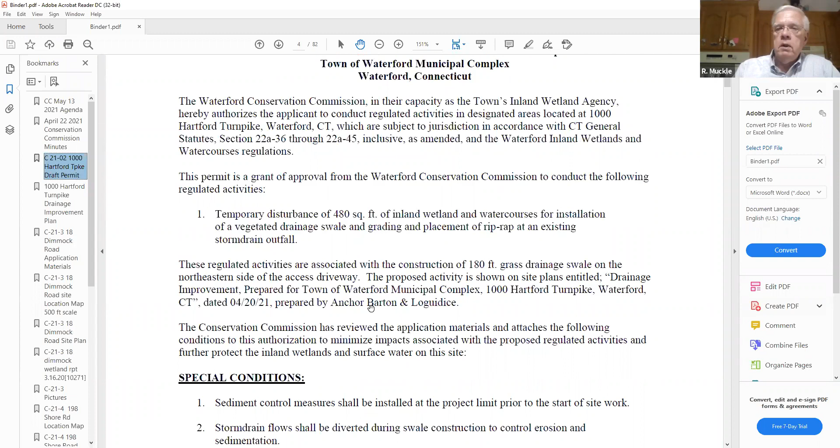Item number 3, application review C21-02, 1000 Hartford Turnpike Drainage Outlet Swale Extension, Department of Public Works applicant, Anchor Engineering agent, review of the draft permit. Questions or comments? Seems pretty straightforward, I think. Thank you, Wade. Any other comments? Questions?

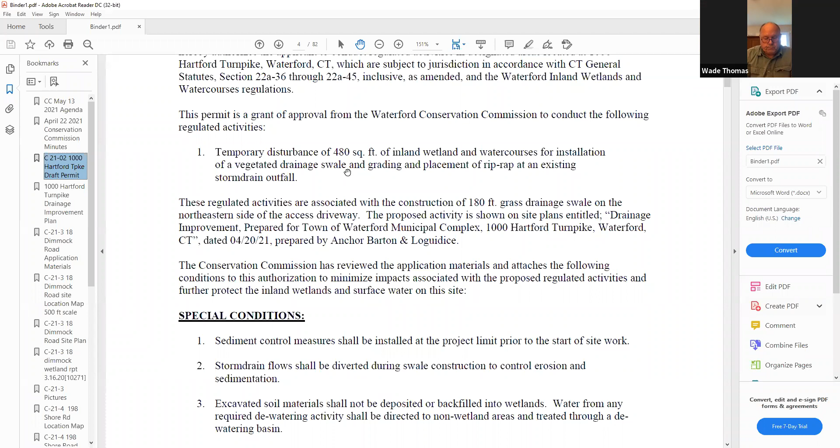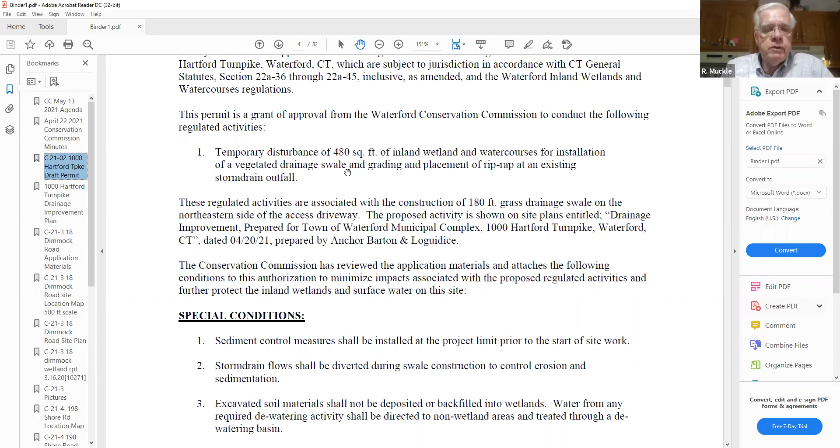Hearing none, I guess we're ready for a motion. Make a motion to approve the draft as written. Wade Thomas. Thank you. I second it, Jessica Patterson. Thank you, Jessica. Any other discussion? All those in favor, please signify by saying aye. Aye. Aye. Aye. Any opposed? Abstentions? Motion carries. Thank you.

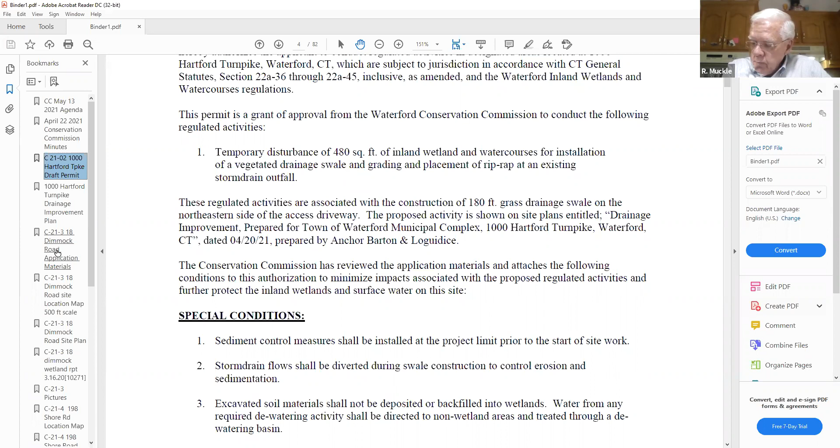New applications. C-21-03, 18 Dimmock Road, residential addition and septic installation. Robert and Grace Kyne, owner and applicant, DLC Engineering Services, LLC, agent. Questions, comments? Okay.

So this is Brian Floric Surveying LLC. I can speak to that, to introduce the project to the commissioner and commission. Well, like I said, I'm representing Grace and Robert Kyne, 18 Dimmock Road, along with Dave Cooley, DLC Engineering Services LLC. Robert and Grace want to install a new septic system in the rear of their property and put an addition onto their home. The addition and the new septic system will be within the 50-foot buffer area. The septic system, which Dave can certainly expound upon better than I can, is antiquated. It needs to be upgraded. It's a little bit of a proactive fix. Ledge Light Health District will not allow them to put the septic system in the front yard. They only want it in the rear.

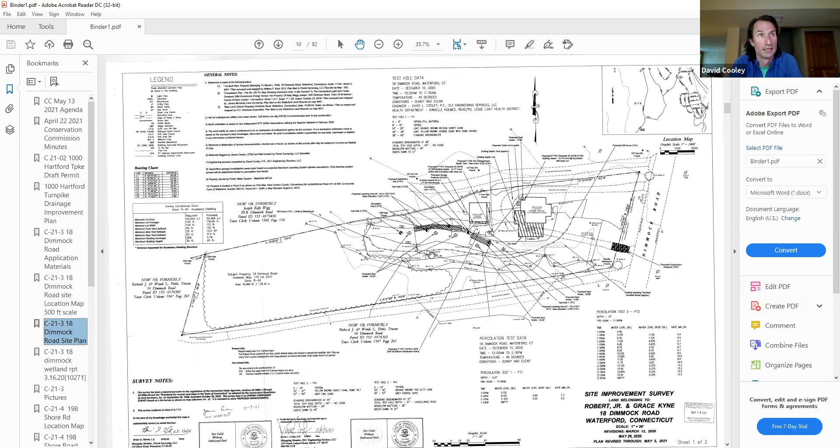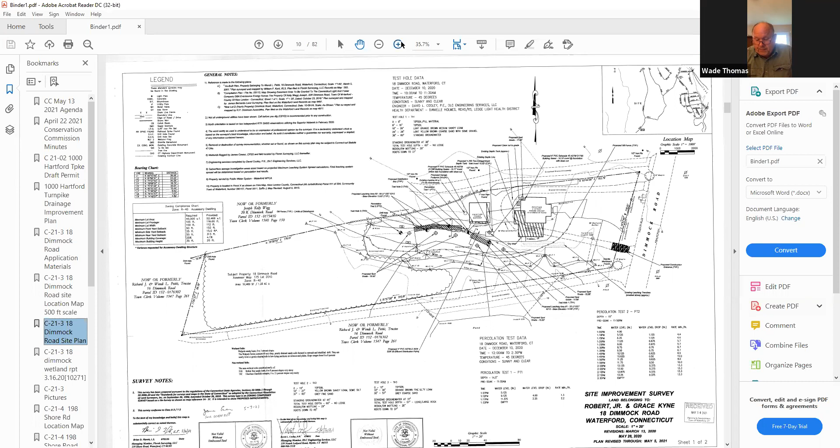Yes, Dave, I was looking at the plan and I'm looking at between wetland flag 6 and 7. There's a line going up to this existing leaching system. Was that just a line for the 50-foot setback, or is there a pipe coming out of there that's going into the wetlands? I can assure you that there's no pipes coming out of the septic system and going to the wetlands.

Okay, it just ends right at the leaching system and connects to the wetlands. I was just kind of curious. Which flags were those that you were citing? 6 and 7. Right there, in that area, then that line connects to the leaching system dashed lines, and I thought maybe it was a pipe. It looked, just kind of curious the way it ends at the leaching system footprint. It kind of goes right through wetland flag number 7. Yeah, 6 and 7, and it goes almost due north, just east of north to the leaching structures. I'm assuming that's dashed lines, so existing leaching structures or system. The dashed, yes.

That line, to me, it looked like a line, some sort of pipe or something. That line is a setback, I believe, from surface water. Is that okay, right, Brian? Yeah, that's fine. I thought it could have been that, but it's just kind of odd the way it ended right at the leaching system, and I just had to ask the question. Thank you. Okay.

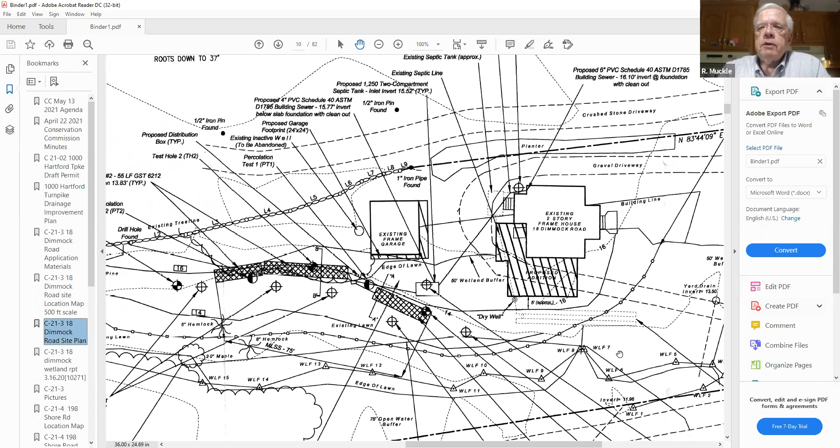Any other questions or comments? So Maureen, this application is just going to be accepted tonight? There's no further action? Yeah, it's set for acceptance. I've had some preliminary discussions with Mr. Floric about it and the owner.

And the fact is that although it's existing land, a lawn in an existing house, it still involves regulated activity, that excavation, construction. It is a much more revised system than the old one. And it is a little farther back, which is nice. And we understand the restrictions of the existing lot. I think it's pretty straightforward if anyone wants to ride by and have a look at it. But the application is complete.

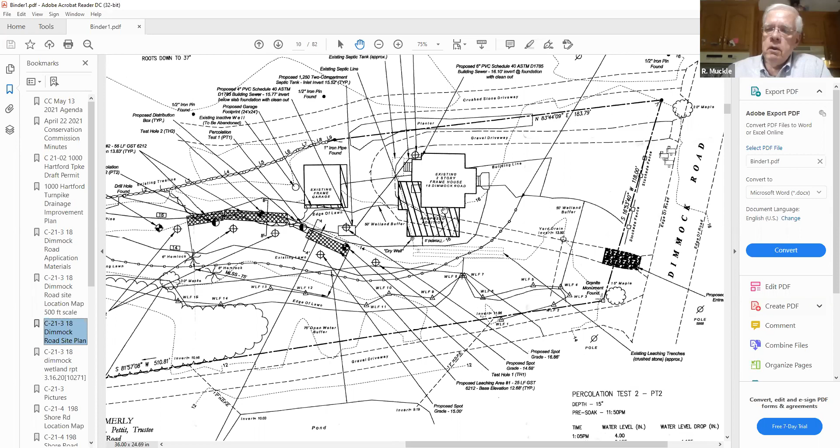We don't need a motion to accept that, right, Maureen? No, it's been accepted and the fee has been paid. Okay. Are there any other questions or comments before we leave C21-03? Yeah, if I could just ask one more question, Wade Thomas.

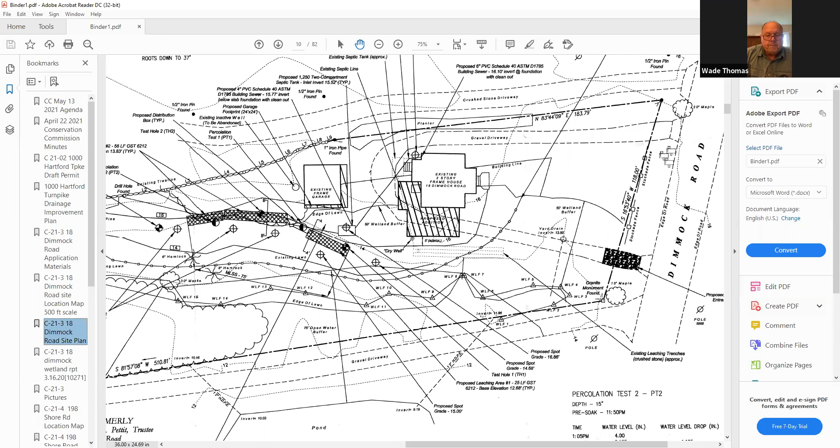The geomatrix, that's proposed to be used. I know it's code compliant and everything, but there's not a lot of storage in the units. I don't know if you're going to have large flows on occasion or that sort of thing. That's the only downside of the units. They're very dense, they're just filled with fine aggregate and the stone. And I was just wondering, was it chosen because it has a large ELA per lineal foot?

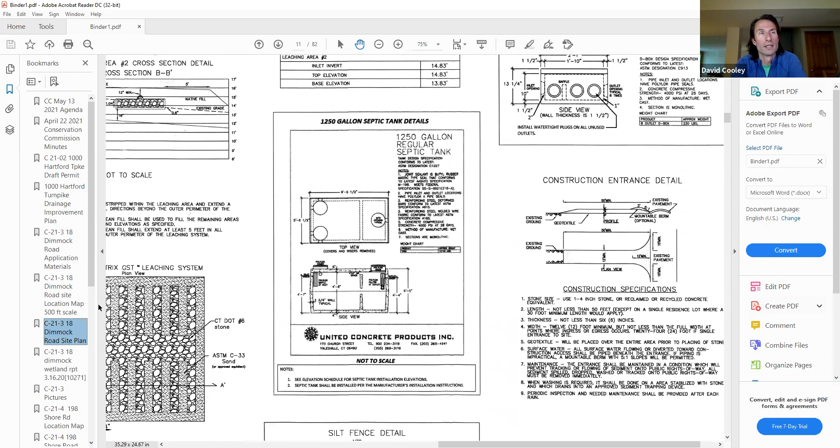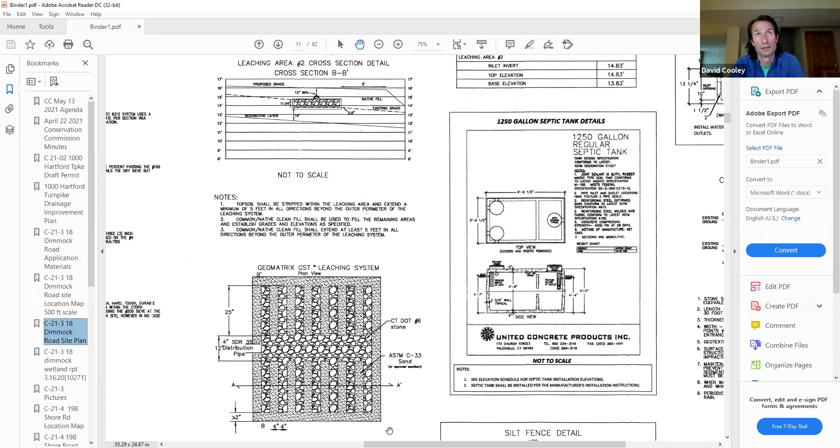Yes, it has a high credit for surface area in the accordion-type arrangement it's installed in. It does not provide the volume of storage that an infiltrator would, but it's the surface area that gives it the credit. I think the peak flows are ideally handled by the septic tank. I didn't establish the credits, but it has the credit it has. It's a nice system for an existing lot, and a stable one as well, without having any volume space within it.

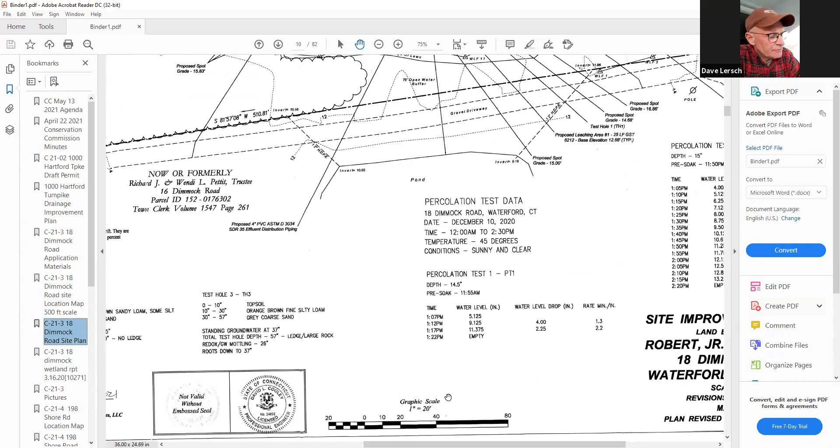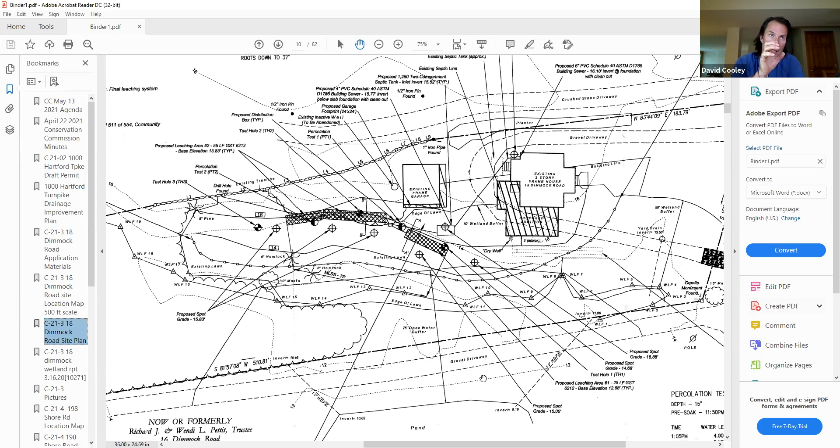Mr. Chair, I have a question. Dave Lersch - I was curious, maybe I missed it in the application. Are we dealing with an emergency here, where sewage is backing up into the house and we need to move this along quickly? No, sir, it's not an emergency situation. The existing system is not in failure. It has been inspected, and inspecting a septic system really means looking into the septic tank - at least they know where the tank is. But it is in a low-lying area, close to that little triangle inlet into the property where the wetland flags are. So it's certainly closer to the wetland than the proposed system, but it's not an emergency.

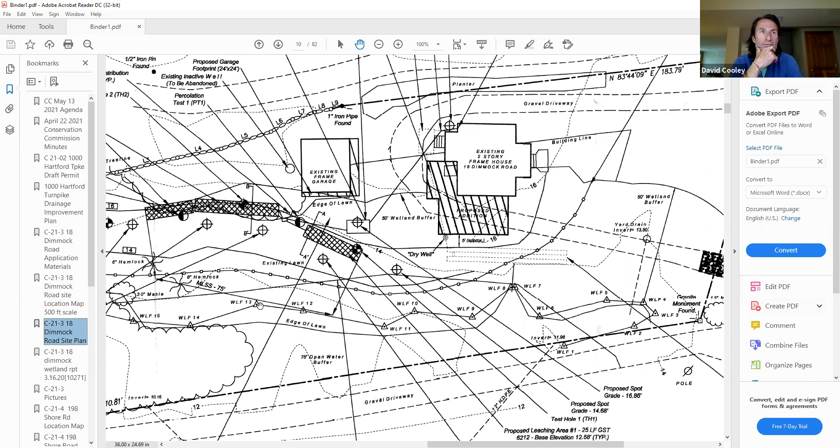Oh, okay, we just don't want to get there. I was curious what prompted this upgrade. I think it was concern over the age of the system and the unknown condition of the leaching system. Well, in my house the system seemed to be working, but everything after the tank had collapsed, so it was probably not functioning properly. But of course, we're hooked up to sewer now. I was just curious what prompted all that.

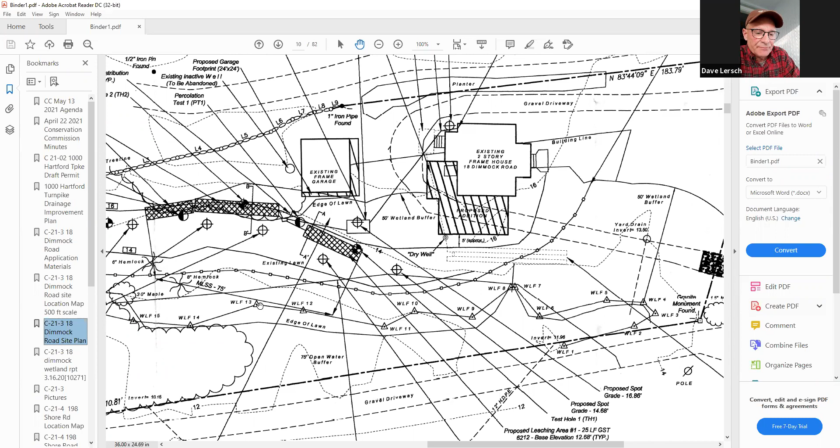Maureen, do you have any other input? I'm just asking the commission, is there any desire to go out there? Is there any reason we couldn't move on a draft permit approval tonight? Just for discussion, does anyone want to go look at it, or can we move forward? Well, we just received it tonight, we can't move on it until the next meeting. I'd be happy to draft up some considerations for the commission for the next meeting if you'd like. I would be in favor of that. This is a very routine issue - there's no emergency as far as the functionality of the current system is concerned. So Maureen, if you don't have any objection to expediting the matter for the homeowner, I think that might be a good idea.

Mr. Chairman, excuse me, Julie Wainscott, I have one question. So are you decommissioning that old system when you put the new one in? Yes, I mean it will be abandoned, and the septic tank will have to be either crushed or removed. Okay, thank you.

Any other questions or comments? So Maureen, it seems to be the feeling of the commission that we can move ahead with this so we can possibly minimize the action time. Any other questions on item number 4?

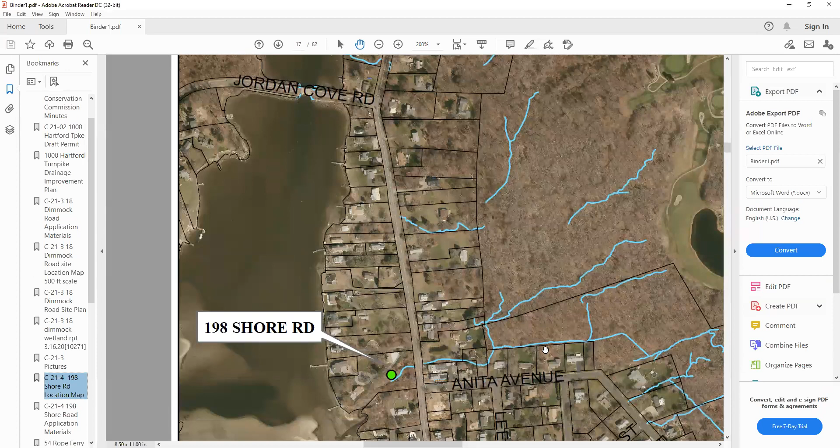Thank you. C21-4, 198 Shore Road, stream channel stabilization. John Lombardi, applicant; Joe Thoreau, agent. This is another one we've just received. Maureen, I think you've had a chance to do a preliminary review of this, is that correct? A little ahead of me, Chair - hang on a second, okay, bring up the site now. I prepared at least some mapping. I think Mr. Thoreau is here, the agent for the applicant. Joe, are you here? Yes, I am. Okay, so I just gave the commission a location map, so they know where they are on this one.

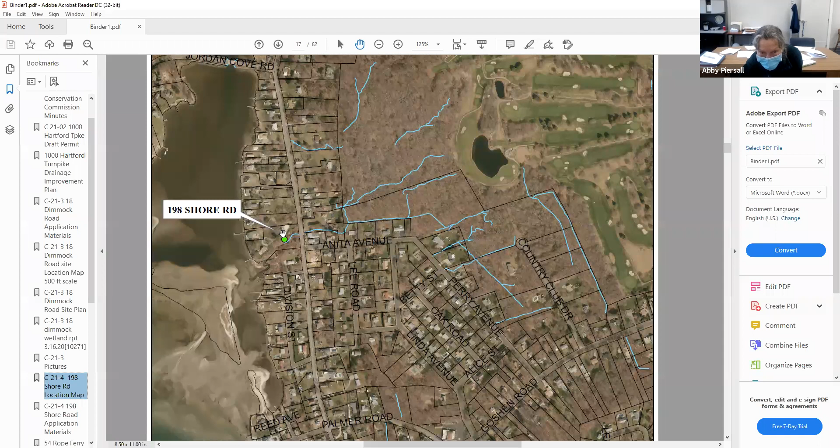So on the Shore Road side, down to the west - hang on, I've got to steer here - just to the west of the golf course, this channel comes down through here. There's a town culvert right here, and a pre-cut channel here to the house where Mr. Lombardi, the applicant, lives right up in here. So just to get you oriented, this application was received, it is complete, and the fee was paid. Mr. Thoreau will hopefully take you through the applicant's desire to stabilize the channel and do some planting.

Go ahead, Joe, I'm bringing up the plan. Have the commission members had a chance to review the documentation I provided?

Yes. So I don't want to reiterate my entire dissertation, but what Mr. Lombardi is looking to do is, basically, you have two sides here, the north and southern sides of the water course. What he would like to do is try to reclaim both sides of the site.

Right now they're heavily vegetated by invasives. We have bittersweet, mile-a-minute vine, multiflora rose, and phragmites along the edges of the stream. What they would like to do is reclaim them and make them more ornamental.

On the north side, what they're looking to do is reconstruct an existing stone wall that you can see on the plan, blend it into the slope with a little bit of grading, and reestablish vegetation along the northern side of the slope with pachysandra and miscellaneous ornamental plantings.

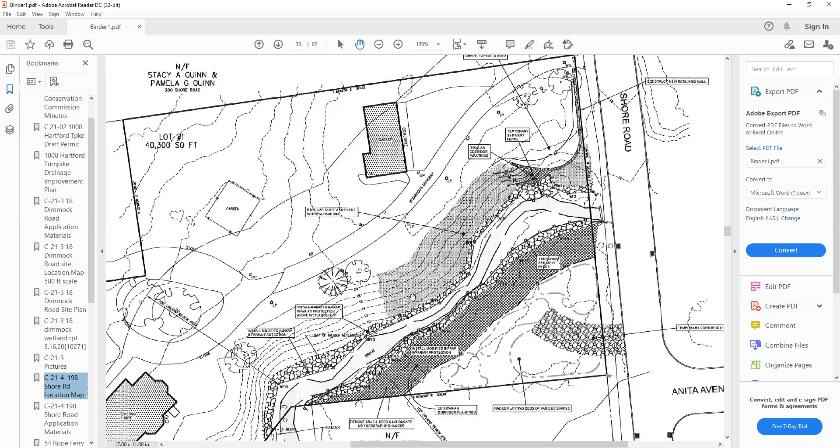I think I provided some pictures for you guys. Due to the vegetation, it was hard to get good photos showing the stream banks or slopes, but you can kind of see what they're dealing with there, and some grapevines growing.

On the southern side of the stream bank, they're proposing the same thing, a bit of riprap along the edges to stabilize and hopefully slow some of the flows to stop the heavy erosion going on. They're also proposing a riparian zone with plantings of warm season grasses and miscellaneous shrubs.

And then to the far south, where you see the temporary construction entrance, they want to do some raised planting beds with miscellaneous plantings. Any questions or comments?

Sorry, but where is the transition? This is Wade Thomas. Where's the transition from tidal wetlands to freshwater wetlands?

Approximately, if you go back to the site plan, I would say the transition is somewhere... if you look on the southern side, there's a large rock denoted, a boulder right around wetland flag 13A. Somewhere between 13A and wetland flag 13 is probably somewhere in there is your transition.

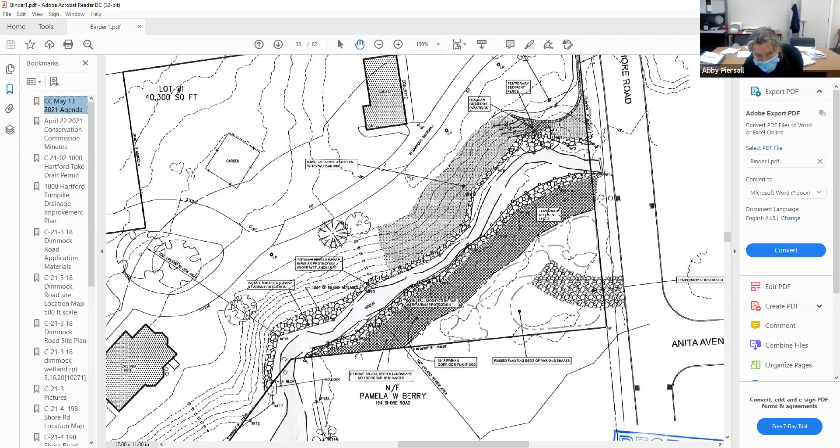Right, yeah. If you look at where the stone wall is proposed, that's kind of the limit of—somewhere in there is where all the invasives are growing. So yeah, from the north side, they have to work from the top of the slope down.

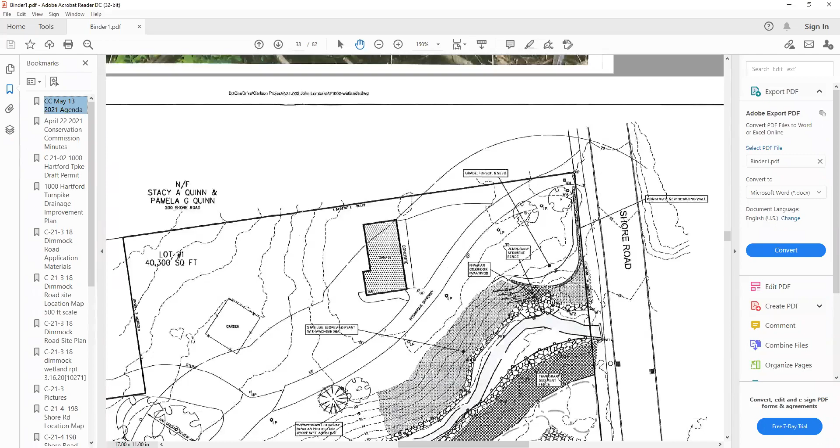On the southern side, the topography is much flatter. So they can move in from the southern side, but they're not going to need to cross the stream in any way, shape, or form. I'm just looking at the photos here, and that embankment is actually treed.

So I'm curious if the extent of the beautification is going to require all these trees to be taken down, and what this is going to become. No, they're not. They're not proposing to take down any of the trees on the northern side at all.

They've got plenty of room to move around. What you're pointing at right there is a dead limb falling down. But no, I'm just looking at the slope here—they've got to get up and down here with a loader and bring riprap down.

Here's the wetland flag right here. Yep, so I'm just trying to ascertain how much of this embankment along this wetland is going to actually be disturbed, even if it's temporary, to place this. So that information would be helpful to have as well.

Yeah, well, like I said, I know they're going to have to be on that slope with an excavator. Once they get down there on that steep slope, they're undoubtedly going to be placing some of that riprap by hand, because it's a steep slope and you can only get down there so far with a machine.

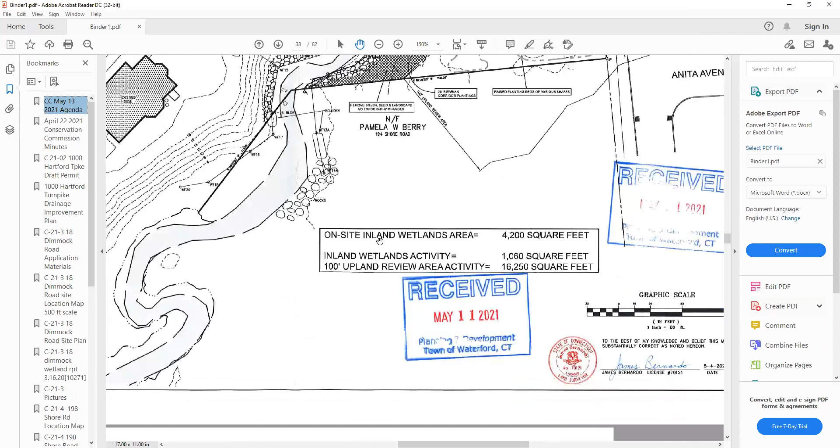So it would be helpful to know the size of the riprap and the kind of equipment. It's going to be intermediate riprap, anywhere from 6 to 8 to 10 inches in size. That's what's needed on that side and that kind of site. Anything smaller would probably wash away.

That brook has a lot of velocity to it. If you look at the stream banks on the sides, you can see how bad it's undercutting in a lot of places, and the size of the rocks that are actually left in place. Right there, that's a good spot. You can see the size of the rocks that have tumbled down. That's about the size of riprap that needs to be in place, because obviously those are not washing away.

So if you were to try to put 2-3 inch stone in there, that stuff would just get carried away. That slope you're looking at right there is probably anywhere between a 2-to-1 to a 3-to-1 slope.

The plan says modified, and the sizes you said are probably more like modified, not intermediate, correct? Modified, yeah, sorry, I'm not a gravel guy. I just wanted to make sure, for clarity. Thank you. So we're trying for anywhere between 6, 8, and 10 inch material.

Any other questions? So basically, that excavator's going to be going up and down the slope, getting the riprap, tracking back down, placing it, going back up. We're talking tens of trips on each side, correct? Undoubtedly, yep. And that's why they're proposing the E&S measures, temporarily.

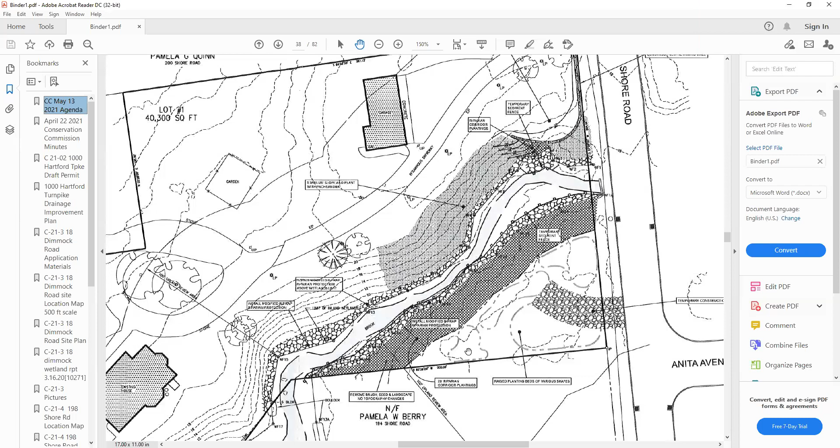Okay, thanks very much. Maureen, we're just going to receive this application tonight, correct? Correct. Okay, do you guys want to set a site walk for this? We usually work through staff for that. But yes, it's something that I certainly would want to take a look at. Okay, thanks very much. Thank you.

Moving on to item number 5, violations: 54 Rope Ferry Road, unauthorized clearing of vegetation and soil grading within and adjacent to an intermittent water course at Rope Ferry condominiums, wetland restoration plan.

Maureen, can you get us started on this? Yeah, I believe Mr. Dave Turner is here to take you through his proposed plan. Okay, I am. Hi, Dave Turner. I'm an environmental consultant, representing Rope Ferry condos on the NOV they received.

We submitted recently this restoration plan to try to stabilize the area that was disturbed back in February. Briefly, there was an area about 200 feet long on the eastern side of the pond at Rope Ferry condominiums that was cleared of most of the vegetation that was there. And the channel was disturbed and wound up running right along the eastern bank of the pond.

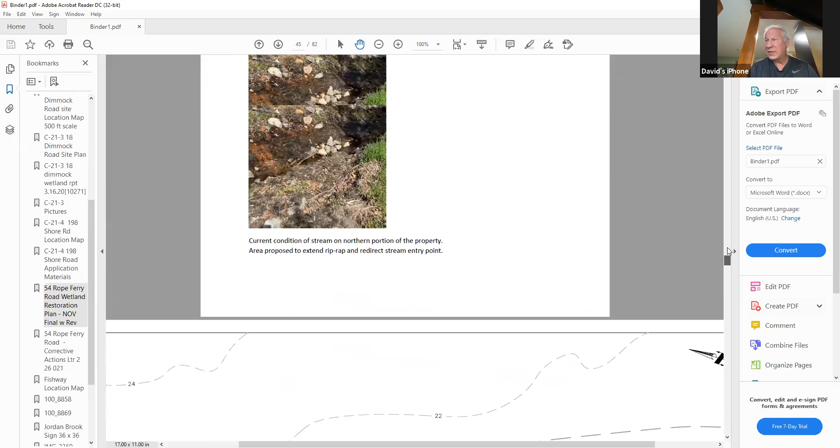A lot of the grass has been growing. The plan is to address where the stream channel comes out and goes into the pond, and to stabilize the edges of the pond where the vegetation was removed.

You can see in this photo some of the work that was done. A culvert comes under Rope Ferry Road. So Rope Ferry is up here, and a stream comes through a concrete culvert, with a very brief, steep section.

We are proposing putting some riprap along the steep section to stabilize the stream channel and direct it from the eastern bank to a more centralized location coming into the pond. Where water hits the pond and reaches a stable level, there's a channel that's about 4 feet wide.

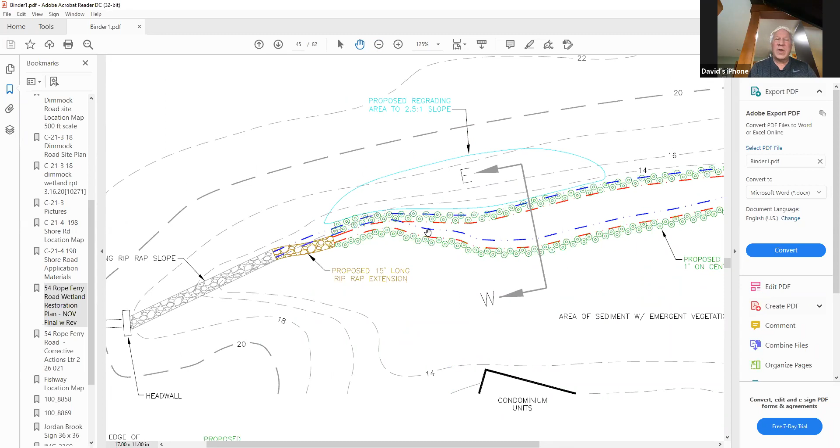We want to redirect the channel toward the middle of that 4-foot section, as opposed to the far eastern side. There are currently some pretty steep banks on both sides, and we want to redistribute the soil to lessen the steep bank on the eastern side as well as the western side. The western side is kind of an emergent vegetation wetland. So the hardscape is for where it's steep grade, and as we reach the pond itself, we do a softscape.

We're proposing planting sedges along both banks to try to keep further erosion from occurring and winding up into the ponds.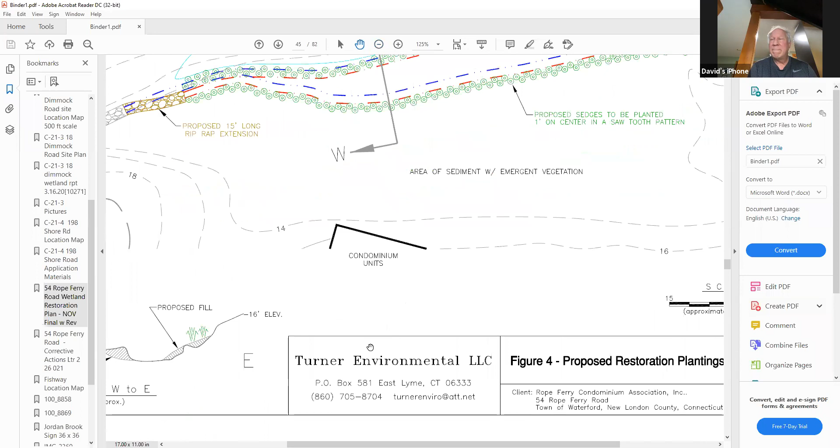Just going to take you to the cross section, Dave. So the solid line is the condition that exists now. On both the east and west sides, there are some pretty steep, almost vertical portions of soil as a result of the removal of vegetation.

What we want to do is take some of the organic soils on the west, which is this emergent vegetation deposition, and smear it along the eastern side. The eastern side is now very sandy and gravelly, and probably wouldn't support the vegetation we're proposing. So we'll use the organic soil from the western side, put it on the eastern side to reduce the grade so it's not so steep, and then stabilize that with plantings.

Do you think that's better than bringing in soil, so you're not excavating out? How much in the emergent area are you going to be excavating to smear on the east side?

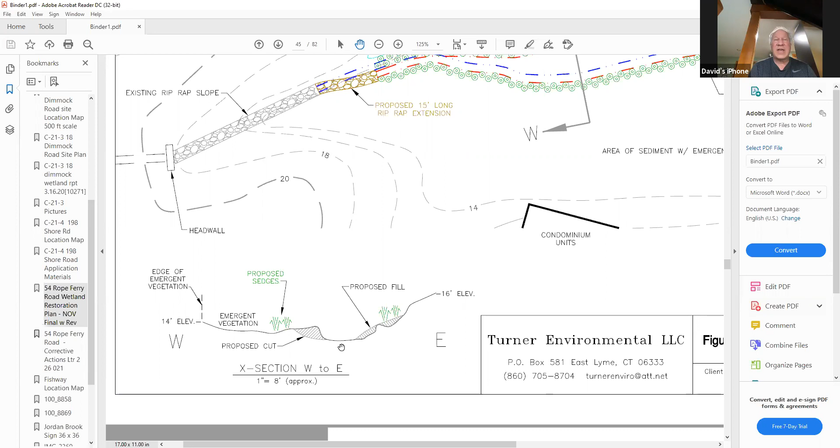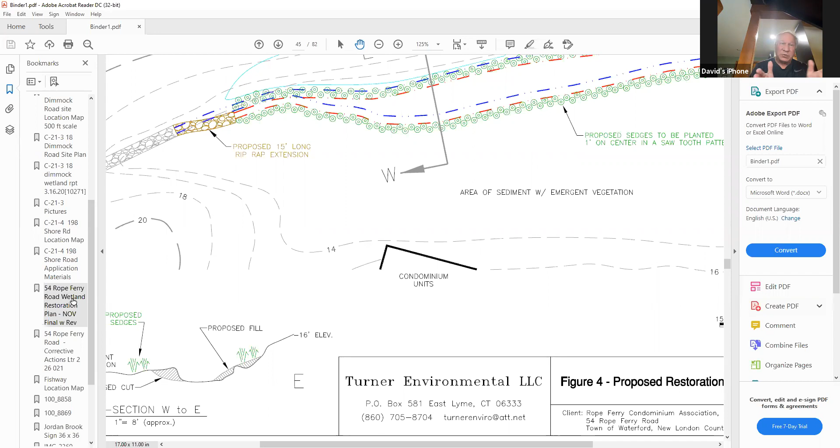I can't tell you the exact volume, but what happened is when the work was done, an excavator was used and it pushed soil, or muck, from the bottom of this pond to the west. So right now there's a little mound of soil, and the idea is to realign the channel by moving it about 2 feet further west. We have to excavate soil from the western side to get the channel away from the eastern side, and that soil will then be reused on the eastern side to provide a better substrate for the plantings we're proposing.

You anticipate the excavator will be on the west side, casting it over the water and laying it on the east, and it'll be manually spread? Is that what you have in mind? Yes, and actually we want to come down on that emergent vegetation and use either mats or 2x12s or something, so it'll be a little mini excavator doing all the work from the western side.

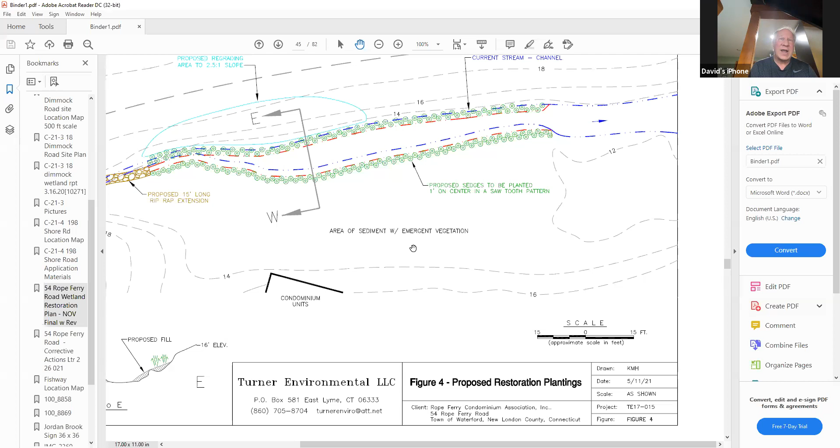Now the eastern side, which has a steeper slope, has largely been restored by planting grass already. Working from that side would totally destroy the stabilization we've already done. All right, thank you.

Let me just help so the commission knows this is the area Mr. Turner's talking about: bringing in a small excavator, taking this cut channel from the violation right in here, along here, a little farther down, moving this cut 2 or 4 feet over this way, taking that material, which currently has a lot of emergent vegetation in it as well, and lessening the cut on this side. The coir log here is nice because if they need to, they can just drop it down.

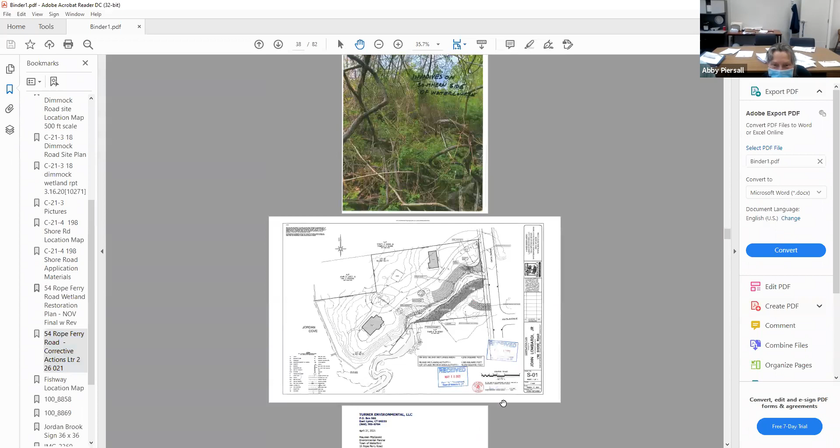Maybe I do, hang on a second. Let me just see if with this one I have the original. Oops, no. Now I'm in trouble, I did something. Katrina's gonna have to fix it. Do I have the original? No, shoot. Okay, sorry, I thought I had it lined up but I don't. Sorry, but I think some of these photos give you a good idea, especially here where you can see.

This isn't so bad, they're gonna be thinking riprap up in here. But when it starts getting really steep in here, this is all just accumulated sediment. Dave's been calling it a pond over the years, but it's really become an emergent marsh. And so in bringing this over, a small excavator can easily do that.

I'm just trying to blow some up so everyone has a chance to see. You can go right in there and have a look at it too. Dave, one of the things I wanted to illuminate for the commission—I know this is scalable, this map.

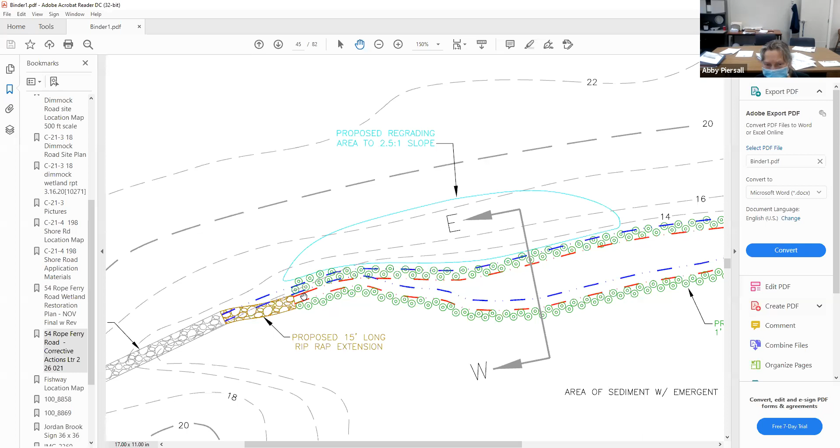So right now the channel is right about here. It's not this wide. So when we push the channel over to here, what is the intent of all this material in here?

So right now where the riprap currently ends, and it's sporadic, it comes out and the stream comes out right on the furthest eastern bank. Correct, and what has happened is it's very steep and it's starting to undercut that bank. The whole idea of extending the riprap is to get the rest of that stream slope down to where standing water will be, and to move it so it's not directing water directly against that eastern bank.

Correct, I'm talking in here—this, I don't have, we're blowing it up for visual purposes. Is the plan also to propose to excavate even more width of the channel, or just move the channel over? No, it is literally to move it over approximately 2 feet west by taking sediment from the west side and putting it on the east side, and that will help buffer the eastern bank with the soil and the plantings from further erosion. Okay, thank you.

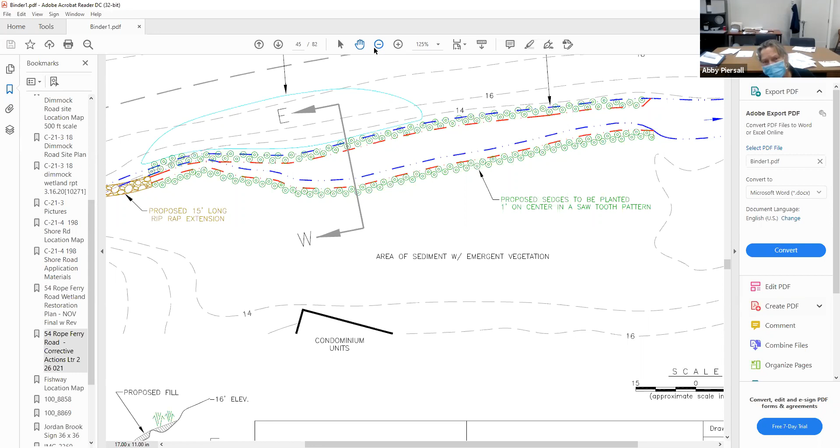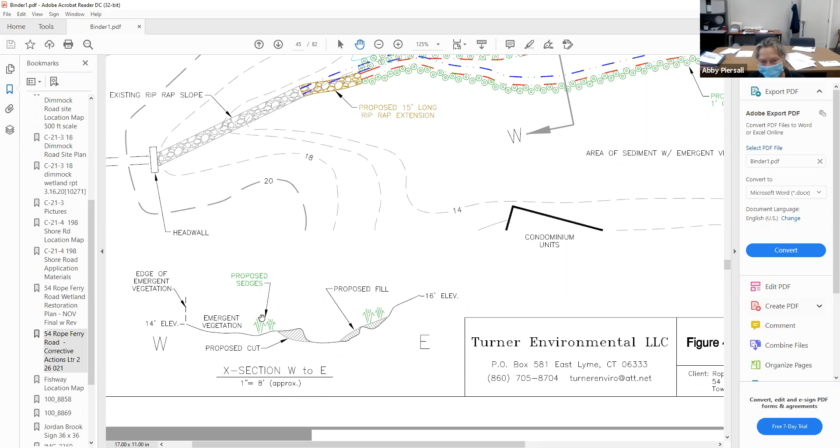Are you pretty comfortable with this proposal, Abby? I've worked back and forth with Mr. Turner on getting enough information so the commission can get a handle on what they're trying to do. This original channel that was dug was a source of the violation. So the point is to try to get rid of the potential erosion and the re-occlusion of the channel, bring it over a little more by using the material that's already in there and rework it. I asked, and of course, all of this, if the commission accepts it, we'll bring it under a permit application for corrective action, and I'll be working with Mr. Turner on getting the numbers correct for that.

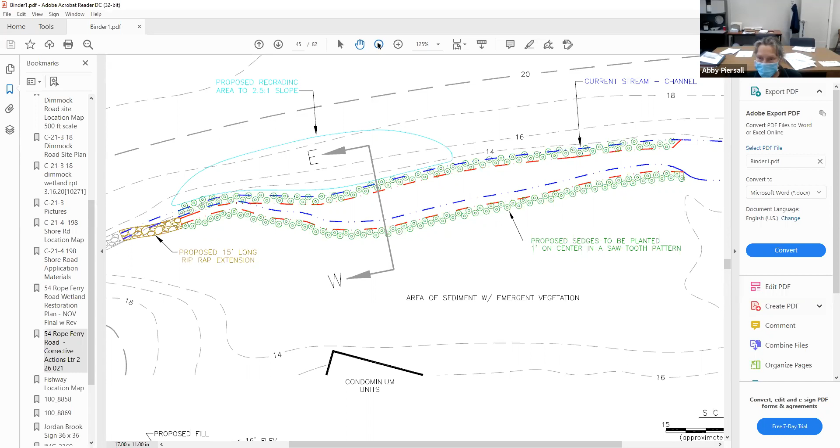But they didn't want to do that until they had some feedback from the commission on if this is enough to correct the violation, but also realign the channel more likely where it should be, and restore the channel banks with vegetation. So generally you're okay with what's proposed, is what I'm gathering. When it's all done, I will be. Yep, thank you.

Any other questions or comments? No, sounds like a reasonable corrective action to me.

So are we prepared tonight with the information provided, or you haven't had a chance to read it all through? At least to accept the plan and ask for a permit, just to document it, because I know they want to get going. I think we're at that point. How do the other commissioners feel? I agree, I'm comfortable.

I'd make a motion to go to draft—Wade Thomas, I second it. Draft, or to accept the restoration plan? Accept the restoration plan, I'm sorry. Julie Wayne Scott, second, okay, thank you.

Motion is made and seconded. Here's the estimate, you guys, just in case you didn't have a chance to read it. So the original disturbance was about 1,400. The total area about 2,100. It's all temporary. All right, so we have a motion to accept the plan.

Any other discussion or comments? All those in favor, please signify by saying aye. Aye, aye. Any opposed? Any abstentions? Thank you very much.

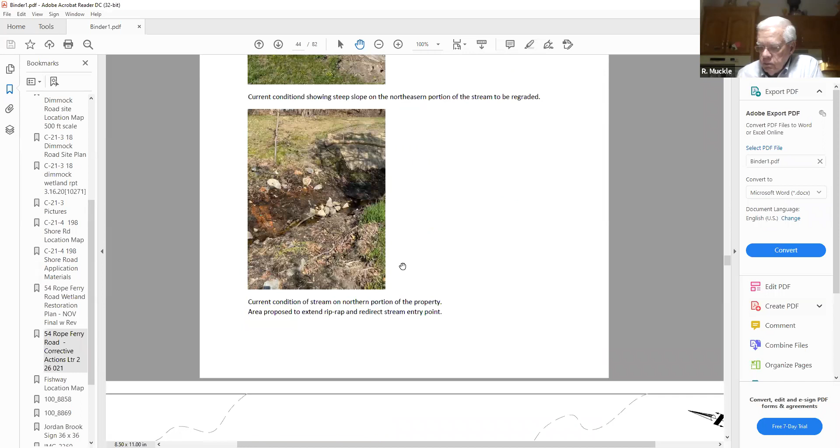Yeah, I have one other business. Sorry, I'm kneeling and trying to do it. No, it's okay. So this is other business really under your conservation hat business.

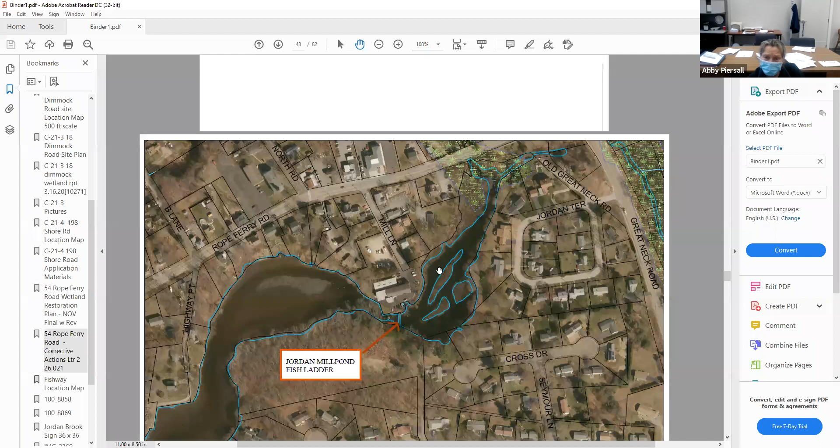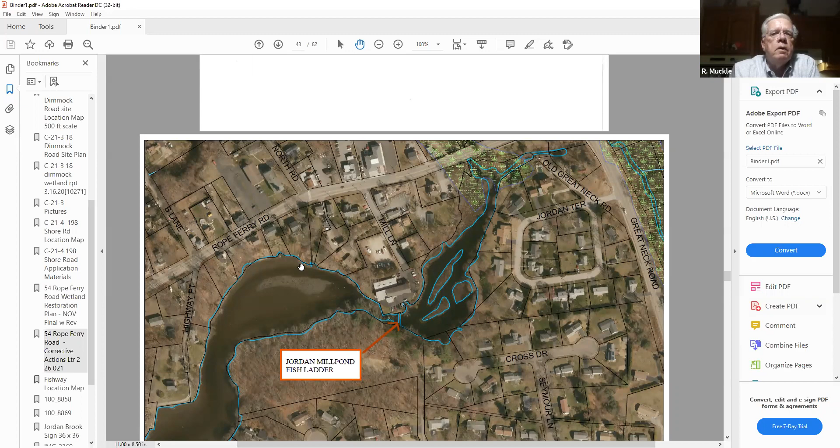In 2006, the town worked with DEP, Save the Sound, and a couple other entities to build the Jordan Brook fish ladder. I don't know if you're all aware of it. There's Great Neck, Jordan Terrace. Here's the Mill Pond Dam, Mill Lane. Here's the park, daycare, and Jordan Firehouse. Here was in 2015, operational. And it put in, here's the outlet.

This controls it, shoots the water through. It was a big to-do. I put this in so I don't not mention everybody, but EPA was involved, DEP, the town of Waterford, Fund for the Environment, and Save the Sound. I wish we had a bigger screen. Wait till next time when we can use the big screen.

So this is for alewife and herring. These are what they call anadromous fish. Big word. Most of their life is spent in the ocean, but they spawn in fresh water. So as part of this area, there's now a fish ladder in here. We don't have anywhere near the runs that they do in East Lyme, Bride Brook, but it's not bad, and it's all helping to restore the ecology of Jordan Brook. They don't just spawn in the pond, but they go up into our brook.

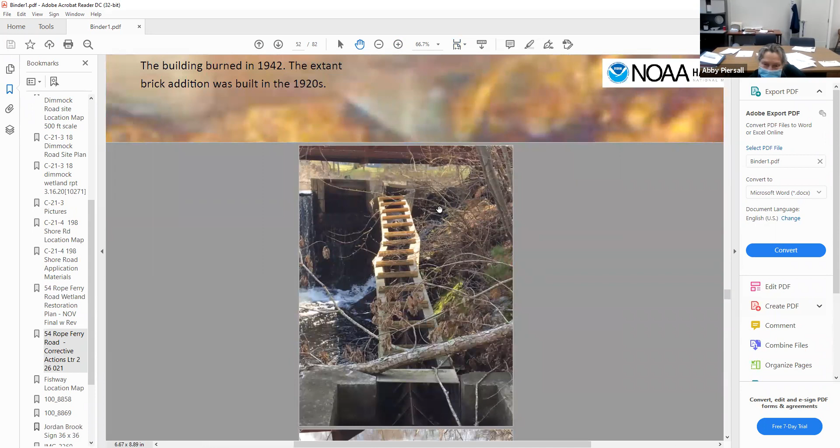This sign's there if you ever want to read about it, and it's in your stuff so you can look at it. But we worked really hard on this, and then one of our trees fell on it just last year. This is after the boys removed the pine. The white pine broke off about 40 feet up in the air and torqued it. It ripped it out of the dam up top.

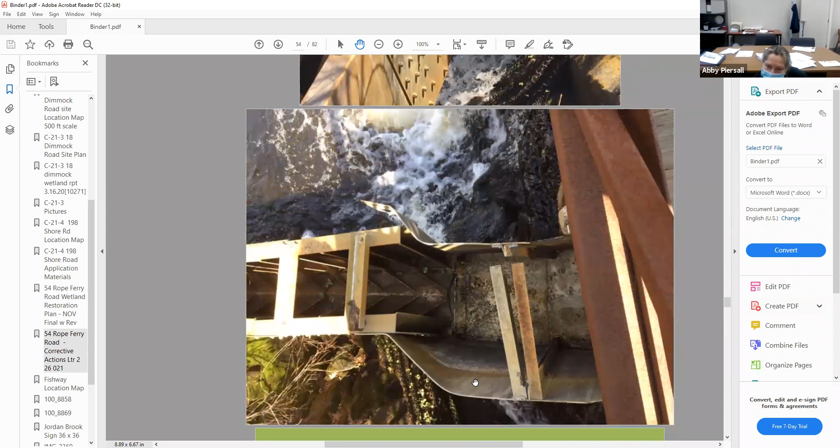Remember, these are my pictures, they're not the best. So they ripped it out of the dam up top. Nothing happened with where it sits in the fish passage, but you can see up in here, it just got even though it was a white pine, thank God it wasn't an oak, but it just twisted it right out. So DEP has shut it down. They don't want to run it because with the twist in the fishway, the waters won't be just right, and it's not going to help them get up. So here's a look going down. You can see how she got whacked pretty good.

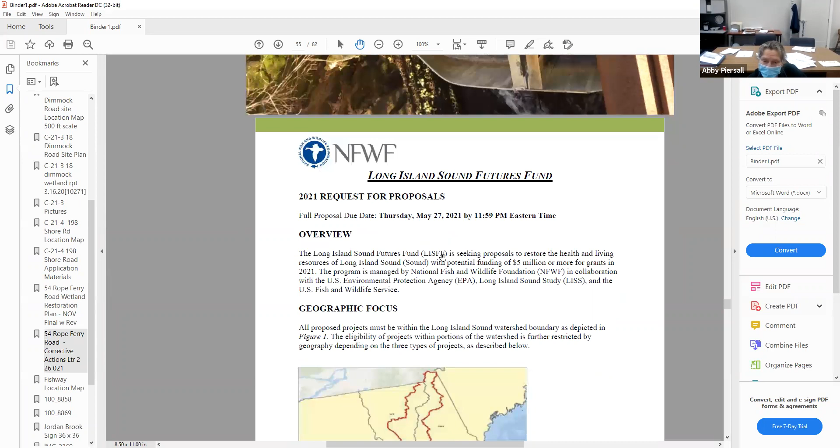So along comes Long Island Sound Futures Fund, request for proposals due soon. Been working with DEP personnel to apply to get monies to replace or help replace the fish passage. It's part of the program priorities - I'm not trying to bore you, and you have it all in your stuff - but some of the stuff they really go for is clean waters and healthy watersheds and habitats and wildlife. So restoring habitat. We got some of the money before, wasn't really through the Long Island Sound Futures Fund, but it's definitely part of that whole effort along the shoreline. We were even before Bride Brook to try to reintroduce the anadromous fish up into their breeding grounds.

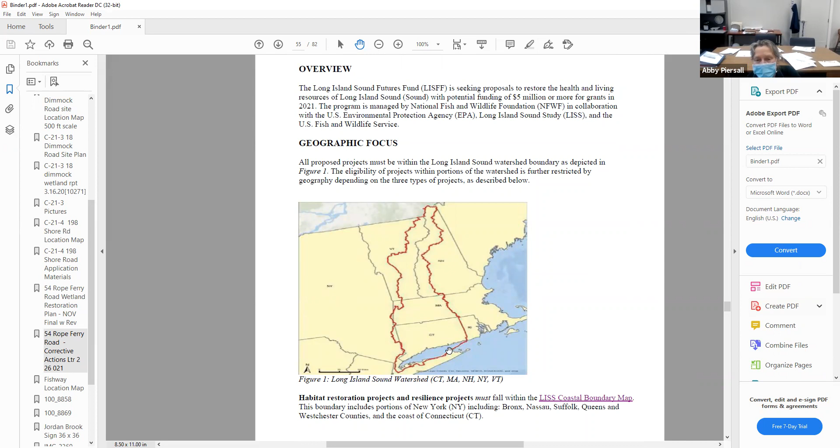So as part of the application that I'm working on with the town attorney and the finance department, everybody else has to be involved. We're really looking for a letter of support, reaching out to the Conservation Commission, reaching out to the Rec and Park Commission. And I know I don't have one drafted for you. I'm just asking for your support. We'll put a letter together and the chair can sign it for the repair and restoration of the fish passage, our continued efforts for the ecological health of Jordan Brook, and to repair the work we worked so hard on in 2006, 2007.

I don't have a problem endorsing this. It's kind of a no-brainer. Absolutely, I support it. I completely support this proposal. Great.

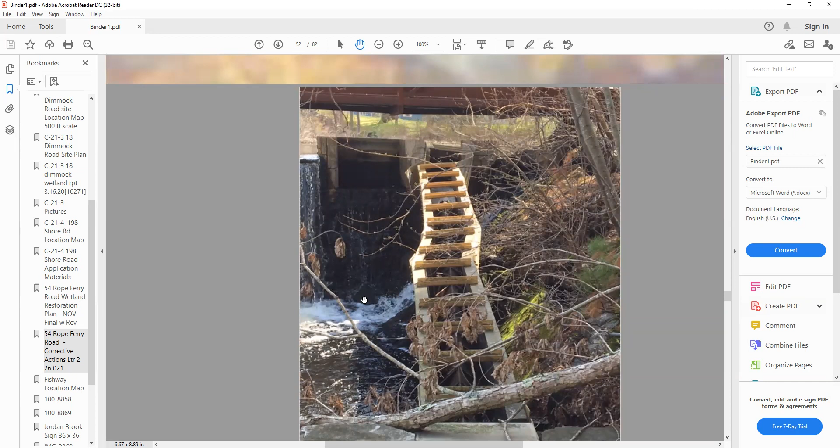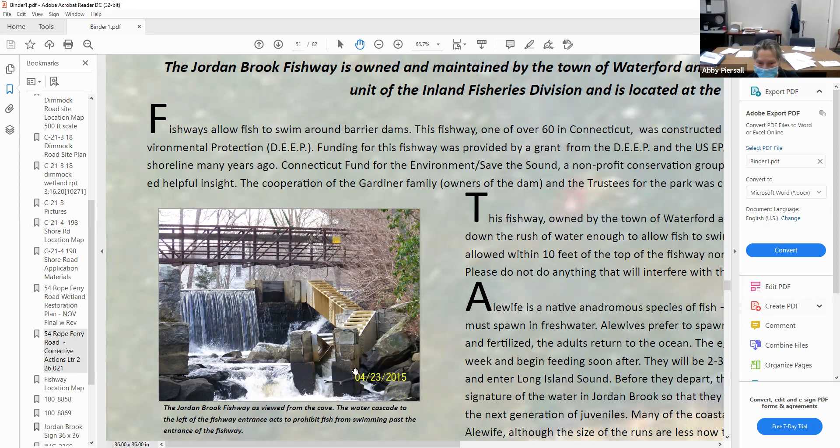I can't see that well, but this is there. So it was all part of, even when we replaced the walkway over here, kids can come down from the park itself and come across here, and you actually can look right down it. It's kind of neat, though you can't really see the fish jumping.

We have some history for the buildings that used to be there, and when the dam was there and when it was built, 1905. So I think it's a real culturally important part, but ecologically it's an important part of all our efforts with our riparian habitat, keeping the water quality clean of this 6.2 mile stream that comes down through the middle of our town.

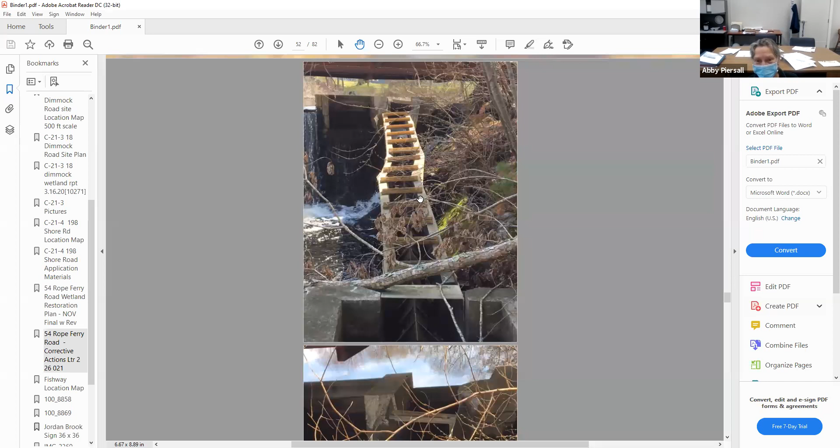Unfortunately, at the end of it, one of our trees snapped. So I'm hoping we have a good shot at it, because we do meet one of the program priorities. We're working with DEP, and they're going to be donating, as part of the match, pieces to replace it that they have in the yard from ones they've taken down. So we think we have a good shot, but any letter of support will help.

Can they also, as part of this, cut down any trees that might pose imminent danger to the fishway, so we don't have to repeat this? I'm fairly certain that's going to be in our scope. That's our stuff, on the town's park property.

We're competing with anybody in this watershed, so it's not a slam dunk, but it's worth a shot.

Maureen, quick question - this is Jessica. If community members or residents of Waterford want to get involved and send along letters of support, is that something they could do directly through you, or is there a different person on town staff I should direct them to?

No, it would probably be more with these kinds of grants. I mean, if you're just a community member, sure, the letter is nice, but we're looking for established entities of the town or the park, because that's who helped put it in the first place and who maintains it.

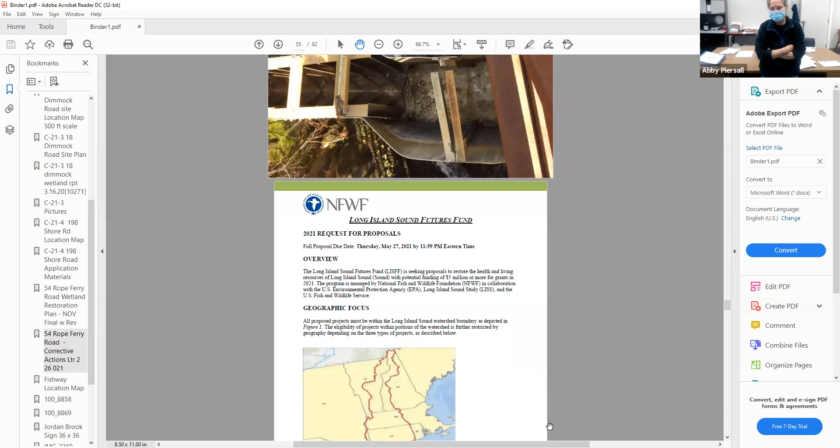I just wanted the record to show that the commission endorses this attempt to procure funds to repair and restore. Absolutely, I don't think anyone will object.

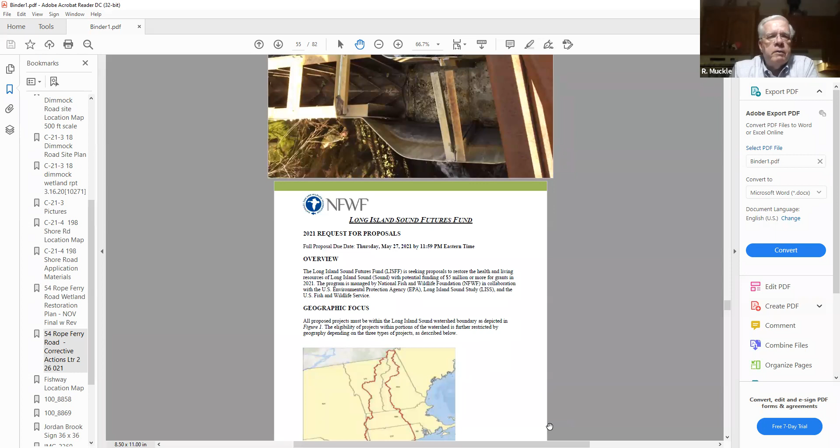So whenever you're ready, Maureen, let me know and we'll get it on. I'm going to go home after tonight, and then maybe tomorrow. Any other comments, questions, suggestions?